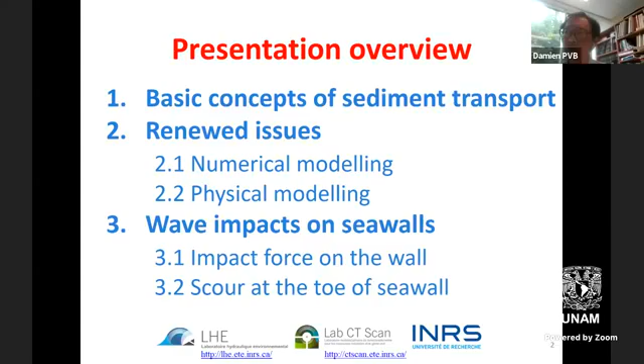My presentation will propose 3 parts. One is some background of sediment transport. Why is this important? What are the difficulties? In the second part, what difficulties can numerical models tackle, but what are the still remaining open questions? Also, the difficulty of making measurements and how inaccurate measurements sometimes are. And finally, I will illustrate with an ongoing study in my lab about wave impacts on seawalls in terms of impact forces, but also in terms of erosion at the toe of the structures.

So this first part is to give you some background, how important, how difficult the study of sediment transport is still nowadays, because it's a very old discipline. A long time ago, researchers were interested in sediment transport because it changed river morphology, it creates river meandering. It is also a problem for a lot of human activities like fishing, harbors, coastal engineering, coastal erosion, coastal flooding, and so on.

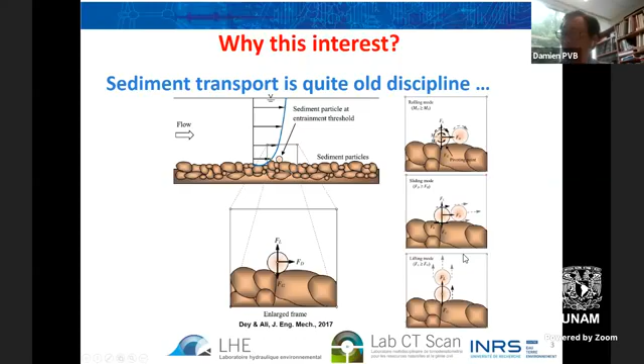Depending on the magnitude of the force, we can have different motions of grains. For low velocity, but strong enough for moving sediment, we can have the rolling motion, so the grain rotates. For intermediate, we can have sliding, so the grain does not rotate and mostly slides. And another is when the fluid flow is very strong with high turbulence, then the flow can pick up sediment directly vertically. So it is not clear that we can describe all of these modes of transport with unique parameters, but engineers consider unique parameters.

So here, the danger can be high pollution, in particular if we break the oil pipeline. It can be also dramatic for communication if we have optical fiber collapse. And we can also have economical impact and societal impact when a coastline is eroded.

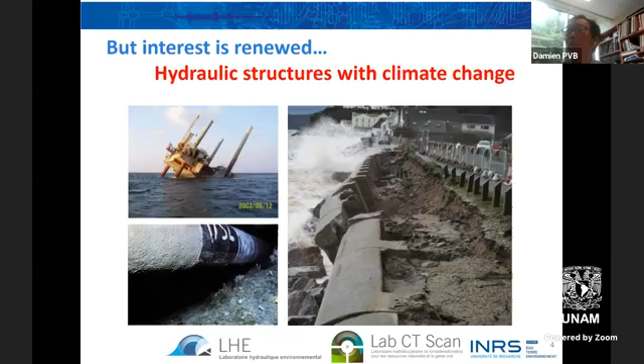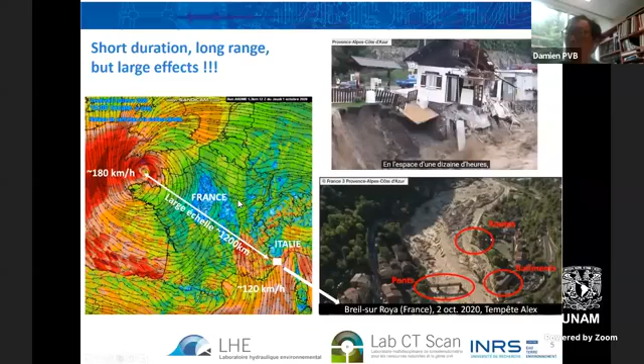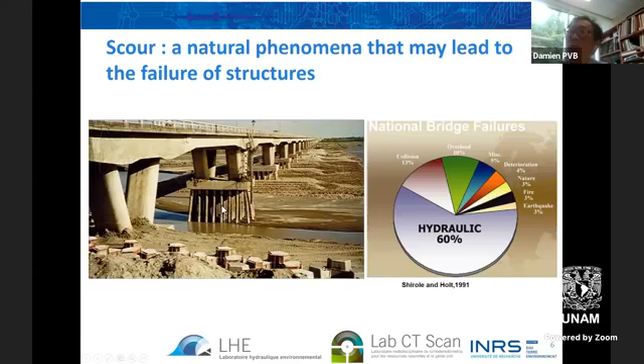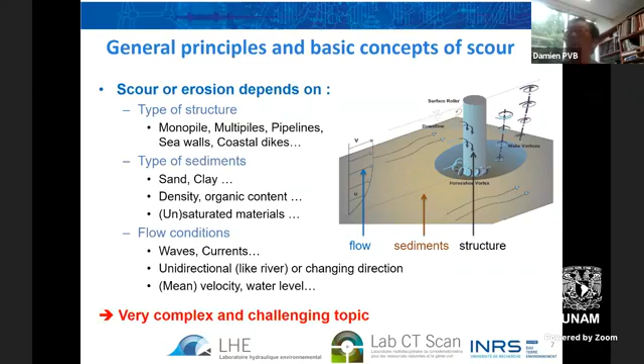In general, in the natural environment, we can have many types of sediments: sand, clay, but also gravels. We can also have vegetation covering that sediment bed. And there is a huge variability in sediment in terms of density, organic content, minerals, and that material can have different states, saturated or not fully saturated. Flow conditions are also very diverse in nature. That can be waves, currents, and the interaction between waves and currents is very difficult. So the system has many parameters, and the physics is still very complex and challenging to describe in both mathematical and physical approaches.

So here are the general methods to study erosion. That can be mathematical, with a computational fluid dynamics approach. Here the challenge is to capture with high resolution the fluid structure interactions, the turbulence, and the fluid particle interactions. We can also use physical models. Here we have a challenge with similitude, with scaling. I will detail later in this talk Froude similarity with free surface flow, or Reynolds similitude for turbulence or forces on structures. I can also describe other similitudes for sediments or for water and air bubbles. Of course, there is field survey, which is very expensive, but important for applications. This part will not be detailed in this talk.

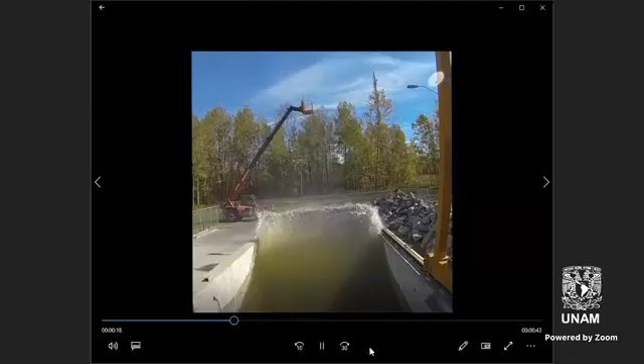Okay, here. So for instance, this is our large wave flume, which can generate realistic waves. And here is a demonstration of wave impacts on a vertical wall. Here the wave is around 2 meters high. The period is around 3-4 seconds. And in this study, we measure pressure at different points, and also the overtopping flow discharge to assess coastal flooding with high waves.

Okay, here I need to share this again. Can you? Yes. Okay, sorry.

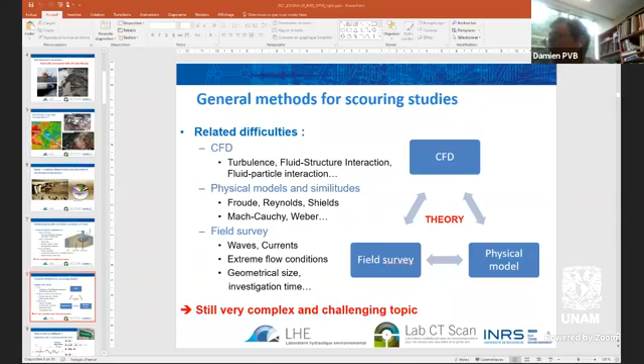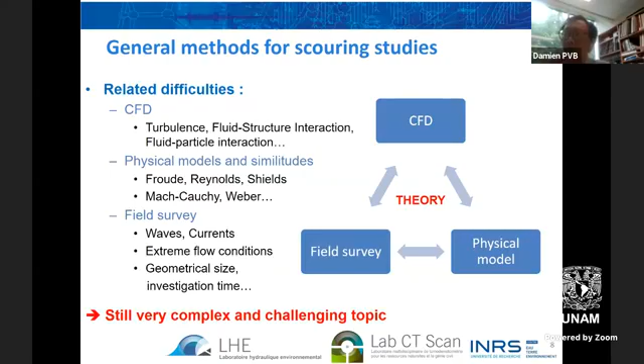Thank you. So just 2 or 3 slides explaining in theory why the interface is a big question. With a fluid sediment, we can roughly assume that we have a fluid over a sediment bed, which can be considered as a high viscosity fluid, for instance. So the mechanism of erosion can be seen as a problem with a 2-layer fluid having an interface, and adding some kind of perturbation will create undulations.

So in fluid mechanics, we have very fundamental instabilities, which are called Rayleigh-Taylor and Kelvin-Helmholtz instability. I will only describe this in 2 slides. So this slide is to give you some notation when we have a high-speed fluid with density ρ1 that flows over another fluid having different density. Here is the mass conservation for potential flow. Here is the motion equation, or Bernoulli equation, and this is the interface equation from the fluid 1 side. We have similar equations for the fluid 2 side with mass conservation, motion equations, and interface.

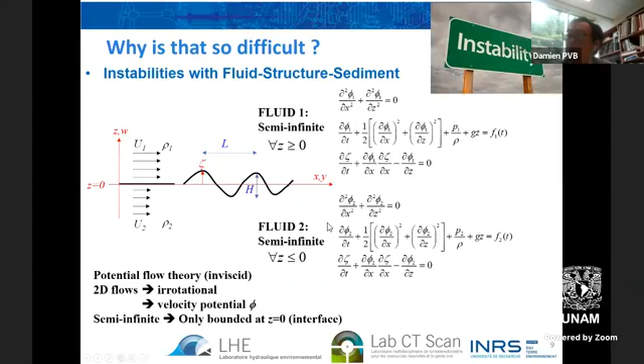Here to demonstrate physical instability, we consider a very simple theoretical case with potential flow, irrotational flow, and semi-infinite media. So linear stability analysis, a useful method for physicists but also for mathematicians, considers the stability around a base flow and analyzes a perturbation which has a waveform. So this is a waveform propagating along x with the phase velocity omega divided by k.

And here we make some analysis on the perturbation by linearizing the previous systems and obtaining this matrix relating the linearized equations in terms of perturbations, and we derive dispersion relations as a condition of nullity of the determinant of that matrix. And this is a classical dispersion relation for the previous system having one fluid 1 over another fluid 2.

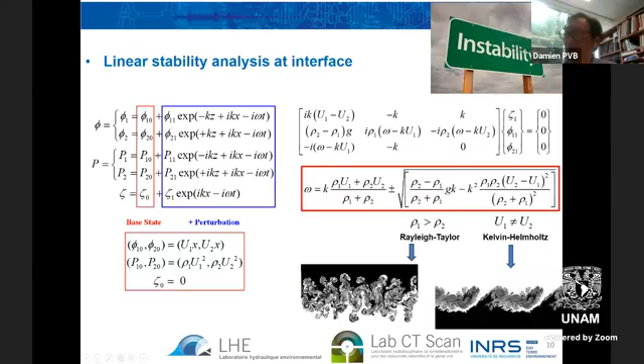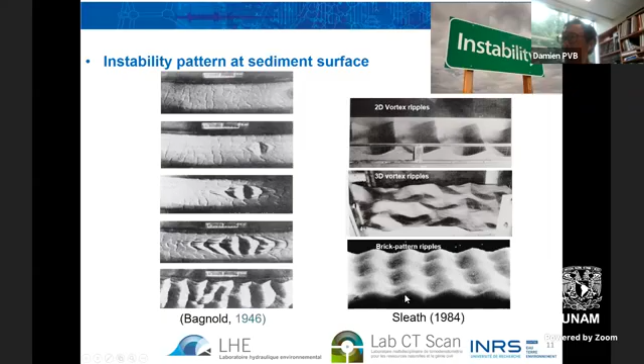Here are also other instabilities that we can observe with waves, starting from a flat bed. We can have undulations like Kelvin-Helmholtz, but with sediment. And here it is only 2D. We can also generate 3D instability patterns, like 3D vortex ripples, and also this kind of more regular pattern shaped as a brick. So this is to explain to you the context, the background of the fluid, sediment, and structures.

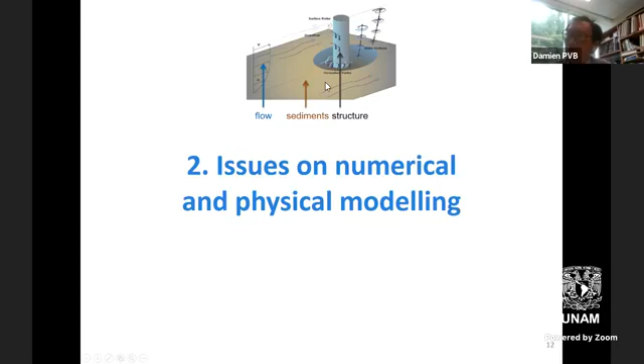So now, with this part, I would like to present the numerical approaches that are available to deal with that kind of system, and also physical approaches to model this kind of system in the lab. So here is the general principle of all numerical methods dealing with mobile beds undergoing erosion and deposition under flow, which can be current or waves.

So we usually start from the geometry of the system to compute the flow. From the flow, we derive the friction or the fluid-sediment interactions to compute the sediment transport. From sediment transport, we localize zones of deposition and zones of erosion that change the geometry, and we loop to the next step to change the hydrodynamics, which will change the sediment transport and also change the geometry, and so on.

This loop is very similar to instability. This is the same engine of instability at the water-sediment interface. We start with an initially flat interface. We impose hydrodynamics, which destabilize the interface. Destabilization of the interface will generate ripples and waves that modify the flow, and so on. So in this part, I will talk about the different approaches to compute that circle.

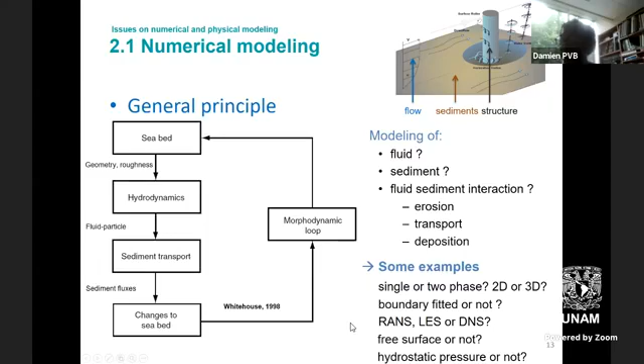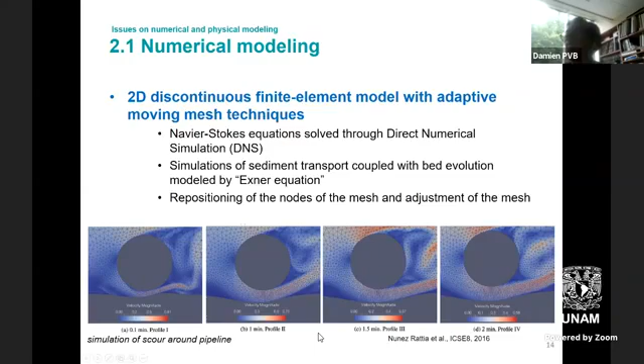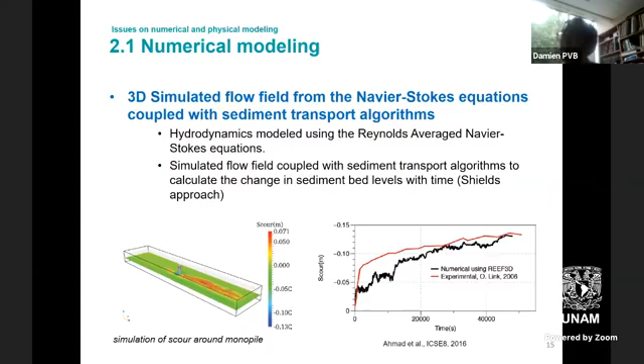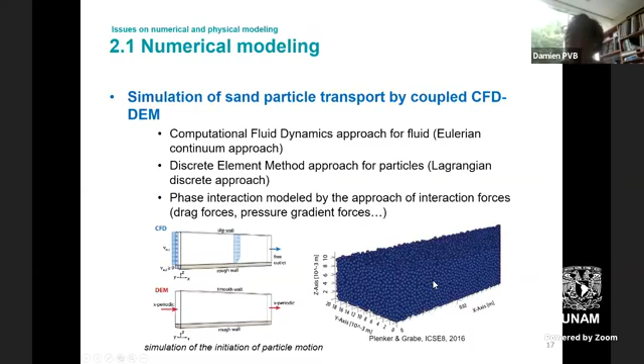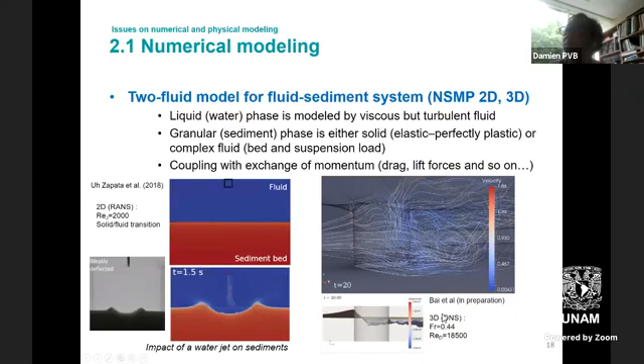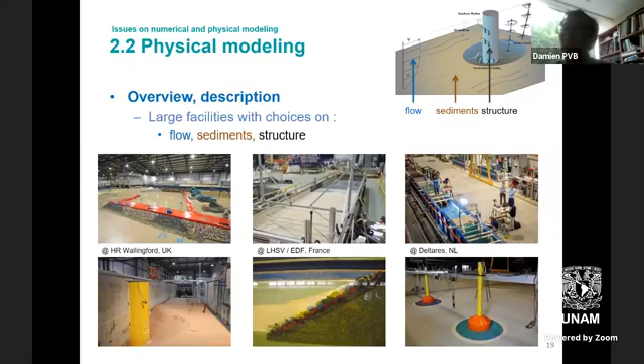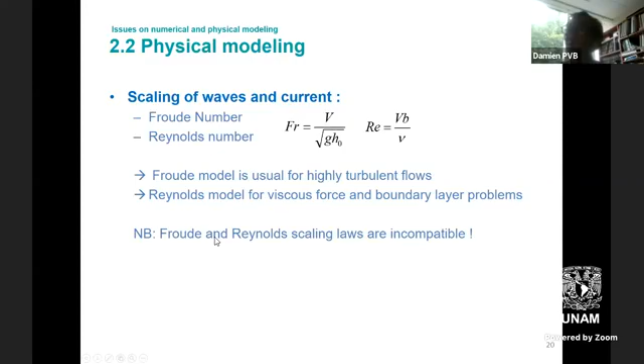One difficulty in coastal or hydraulic engineering is the compatibility between both similitudes. As we know, for water, Froude number and Reynolds number are impossible to fulfill together. So the only conditions to respect both scalings are to change the liquid, which is not very easy for a large facility, and, of course, having a scale reduction equal to 1, which is also not convenient for laboratory conditions.

When dealing with structures, we also have to consider interaction between waves and the structures. In particular, you can have diffraction, you can have a different pattern in the wake regime. So in this case, we need to fulfill another non-dimensional number, which is called Keulegan-Carpenter, showing mostly the transition between drag and inertia.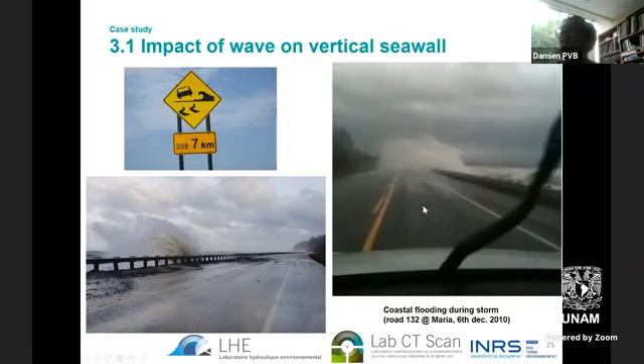For instance, this picture was taken in Quebec during a tropical storm 10 years ago, showing extreme waves overtopping the coastal defense with a big risk for drivers. And here are post-event photographs showing damage on the road. Coastal waves can also transport debris like wood or rocks, and this generates very costly repairs.

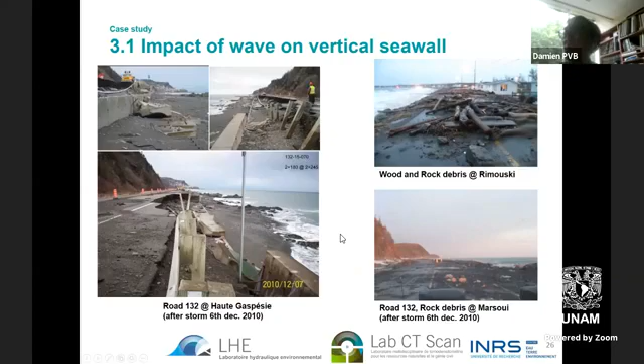And of course, with climate change and sea level rise, extreme scenarios increase. So the ministry is interested in protection for this kind of road. Here are also other pictures showing erosion near infrastructures or structures. If you see such a landscape, you can clearly see erosion like this. Usually erosion starts at the toe of the embankment of the structures, and by a regressive process damages the whole structure.

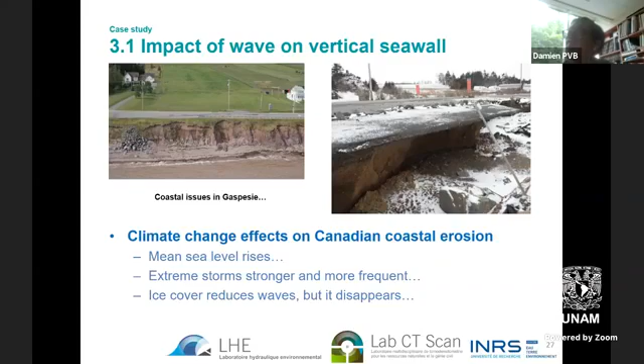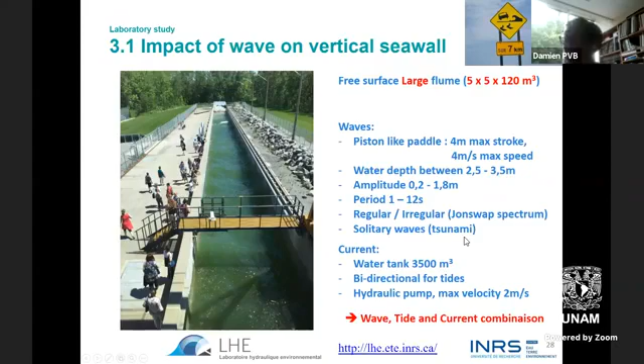This is why we conduct different investigations for the ministry on wave impacts on coastal structures like seawalls, but also on dikes. Today I will talk about seawalls. We did experiments in our large flume, which is 120 meters long, 5 meters wide, and 5 meters deep. We use a piston-like paddle to generate waves up to 2 meters. The wave period can be up to 12 seconds, and we can also generate solitary waves like tsunamis. I show you the facility.

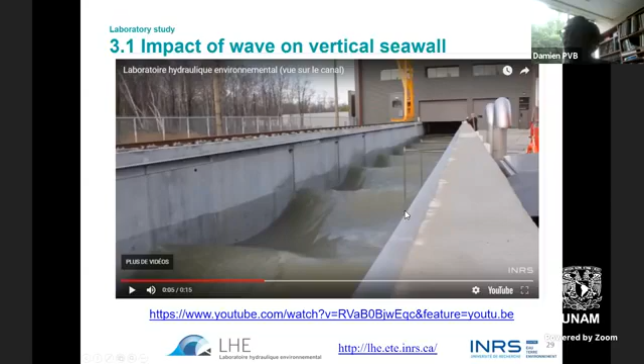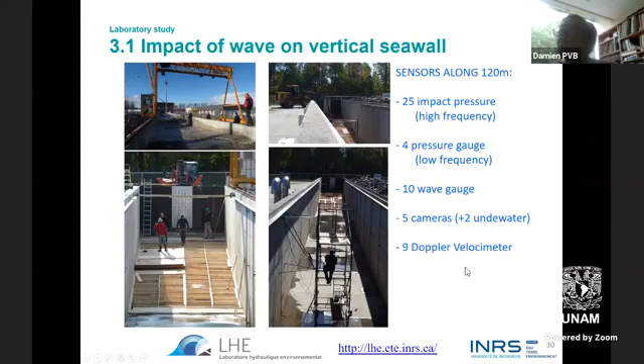Here the scale of the model was 1/2, so it's very close to natural scale. For the construction, we had a big team to build the wall with instrumentation of 25 pressure sensors to measure at very high frequency, 100 kilohertz, the impact pressure of waves on the wall. We also made velocity measurements and measured waves as well.

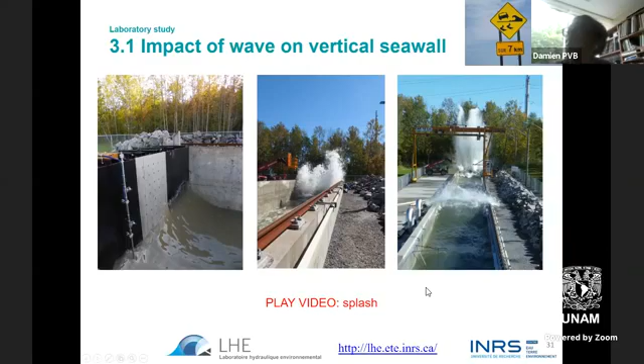Here are some pictures of the waves. It was not easy to measure aeration of the waves. We also measured behind the structure the water overtopping the coastal structures. Here are typical examples of types of waves impacting the wall, having or not air bubbles. And we did analysis on pressure in relation to aeration of breaking waves.

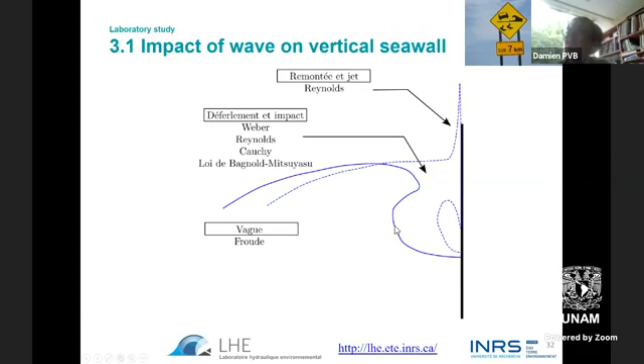water with bubbles. So this is important because if we want to reduce force on the coastal structure, it would be interesting to build a breaker in order to maximize the presence of bubbles in the wave before it impacts the wall.

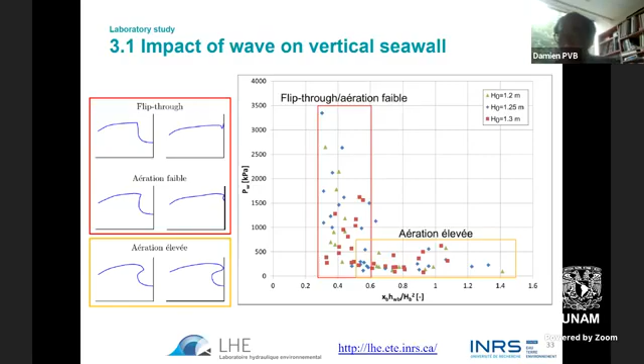So here is a diagram showing the experiment, the main results. So short peak duration with a very high pressure on the wall for non-aerated waves or incompressible flow, and long peak duration but low pressure on the wall for broken waves with bubbles.

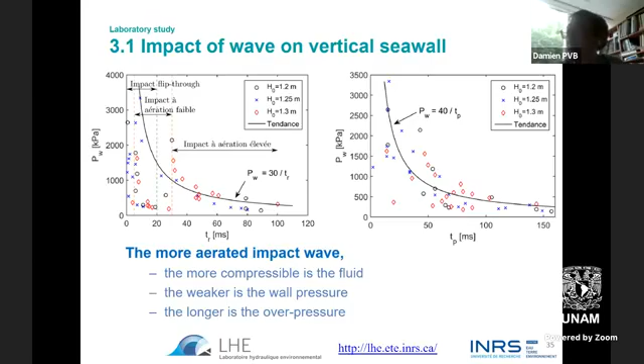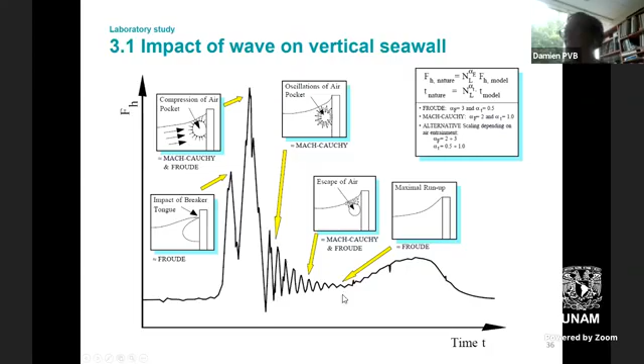During experiments on wave impact on a vertical seawall, we systematically observe scour at the toe of the vertical wall. And the ministry was particularly interested to better understand the mechanism and the depth magnitude here because of the stability of the coastal protection.

In particular, this image presents some basic mechanisms during the wave impact to a vertical seawall, showing the ascending jet forming a splash and an impinging jet to the bed, forming a scour hole here. Of course, if the scour depth is deeper than the foundation of the coastal protection, then we can have a risk of collapse of the protection itself. So this is why we focus our study on this kind of phenomena.

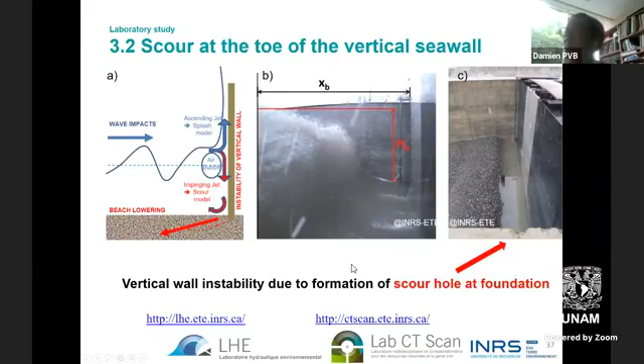Sorry. Yes. Sorry. You only have a couple more minutes. Okay. So just go to, yes.

An interesting part of sediment transport research in our lab is the measurement of bed forms or instability patterns at the liquid and sediment interface. And in particular, we measure the formation, migration and maturation of the waves of the interface in order to compute and to validate numerical models like this.

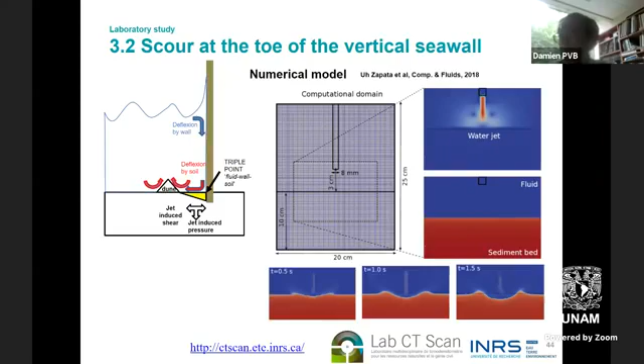So to conclude, I will recall that sediment transport is still a very open problem, with open questions. The main difficulties are the interaction between one phase, liquid, and another, sediment. This interaction, this complexity, is enhanced if you introduce structures. So in particular, my student Mario will give you some results on numerical models.

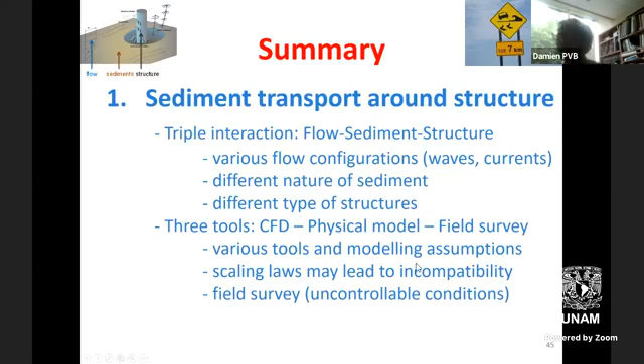And there are different approaches to deal with these problems. One is computational, which requires physical parameters. I explained that physical parameters are sometimes uncertain, and sometimes they present large errors, in particular for motion criteria, because it can depend on the mode of transportation: rolling, sliding, or lifting. And one difficulty in numerical models and also in physical experiments is the role of turbulence that gives perturbations at all frequencies that can destabilize the bed.

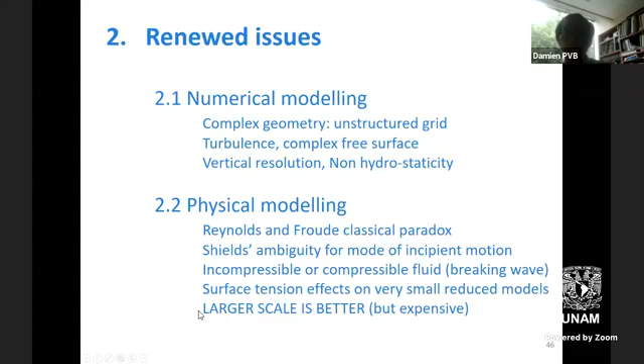And about the ongoing research efforts we are doing in my lab: large-scale experiments with a large wave flume, and also numerical investigation on scour erosion.